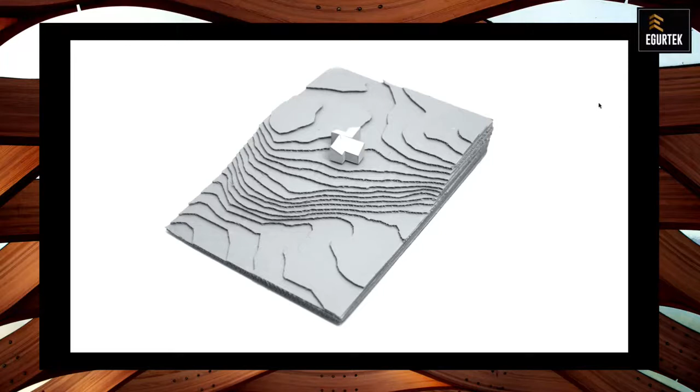As a site strategy, we needed to consider the views from the site as well as the program, but we also wanted to address the climatic setting. While it's in central Norway, the summer and winter climate is very contrasting and relatively rough, as you might imagine in the northern hemisphere.

So the orientation of the building on site creates two outdoor sheltered spaces: one in the lower left of your screen, the morning gathering area, and the other on the right, the outdoor gathering area for the afternoons and evening sun—making use of the limited solar exposure in this type of climate.

As you might know, we have very little sun for 6 months of the year, and then lots of sunshine in the summer. So we try to make the most of the sunlight that we have.

Additionally, the site has views in 4 directions: towards the lake, towards the forest, towards the hillside, and up to the sky. So as a site strategy, we designed with the views in mind, pointing the wings in the direction of the views.

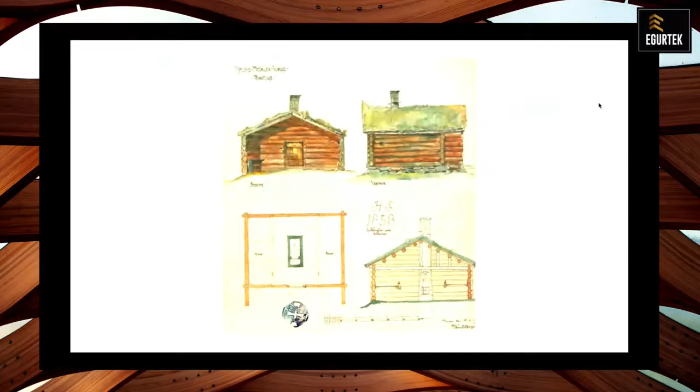This drawing is of a traditional Norwegian cabin from the mid-1800s, and if you look at the plan on the bottom left, you see there's a central fireplace that really forms the heart of the building, and it creates 2 different spatial zones within the cabin, one for living and one for sleeping.

Similarly, the plan for this project is organized around these functional cores that are placed in the center of the wings, allowing the functions to be compactly concentrated into zones, which subsequently allow the space to flow freely around and above them. So they really become spatial organizers and organize the experience of being in the cabin itself.

And this configuration also really helps with the economy of the space. At 85 square meters, here shown, it can sleep 12 people.

The spatial arrangement of these cores has the ability to allow an expansive openness, even on a relatively small floor plan. The cabin feels quite large, also with the high ceilings and the way in which we have manipulated the light and the openings to the exterior, allowing the wings and the zones to flow freely around the cabin and really connect to the exterior as well.

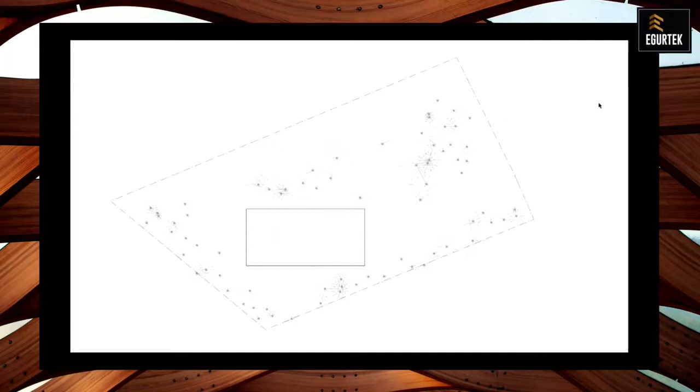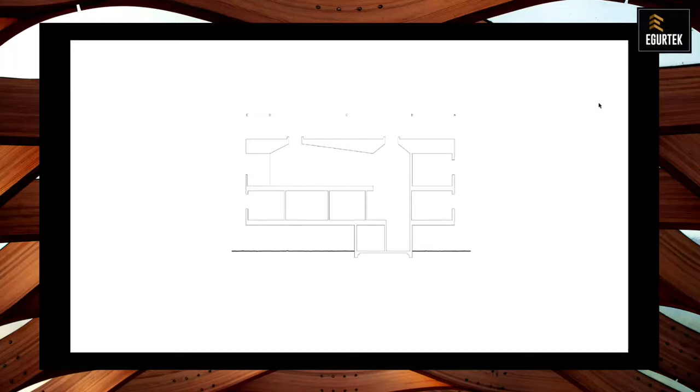Based on the alpine chalet type, the house is lifted on concrete legs to protect it from the large amount of snow that comes in the wintertime. The program is stacked on 3 levels. The entry level is where the skis are kept and where you enter. The bedroom level is the second level, and the top level is the public zone with living areas where the family gathers.

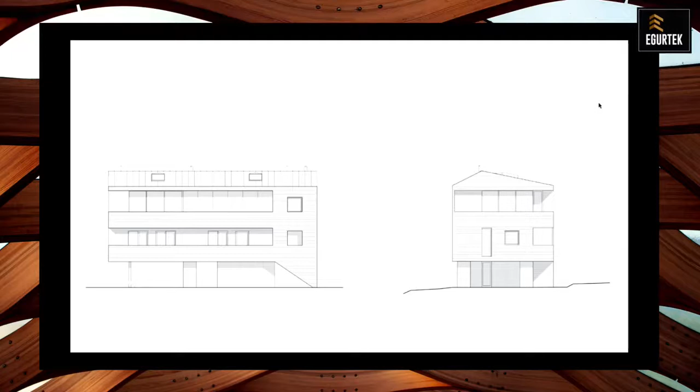Here you get a reading of the concrete plinth, how it functions, and how it's built so that it can be robust and sit exposed to the snow for an extended period of time. On the west and south facades, we have large, deep overhangs to protect the window openings from the summer sun, which is very strong in California, and also to protect the balconies from the snow in wintertime.

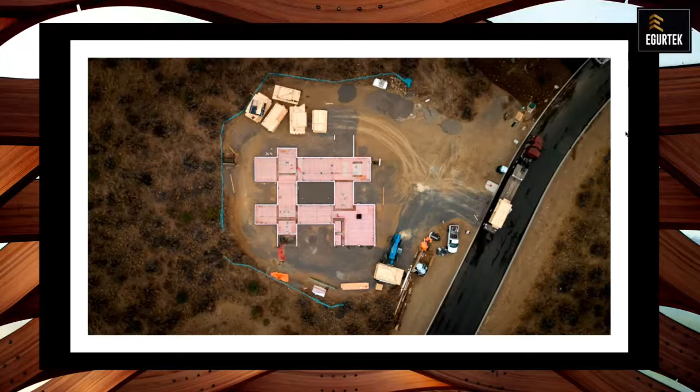In the floor plan, you see there are some formal similarities to the first project, both in plan and in the roof form. And we see this project as a progression from a single pinwheel or cruciform plan to more of a woven courtyard typology.

It also has greater indoor-outdoor connection with larger windows because of the climate, being in Oregon, and also being able to have more direct physical access to the open and the closed courtyards, as well as the landscape beyond.

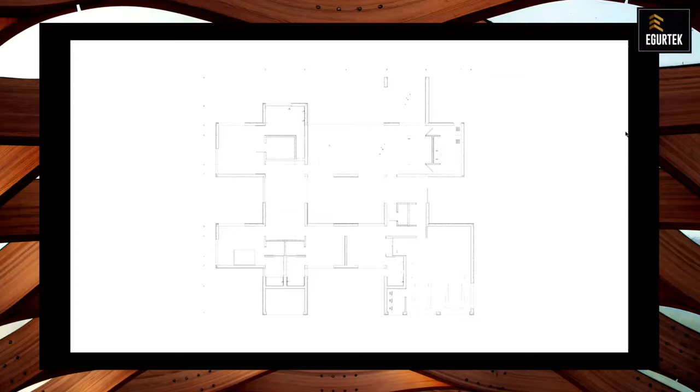But the plan is really designed to be able to flow around the different zones of the house, a house almost without corridors like the first project I showed.

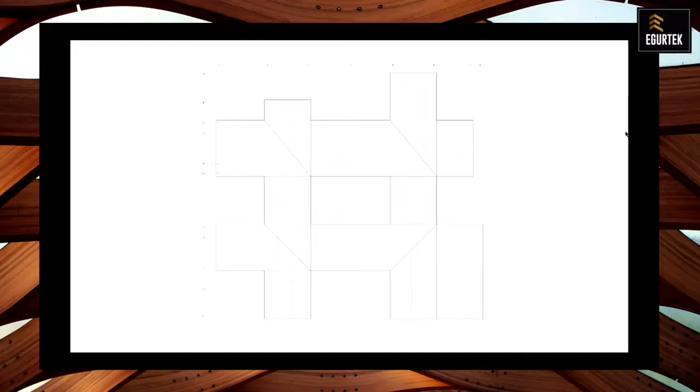The courtyards are used as a way to organize the spaces and shield from hot summer sun and the winter winds. Here again, the different wings are reaching out into the landscape, creating a wider range of spatial types and program functions. The courtyard is really the hub of the house, creating more private spaces around it.

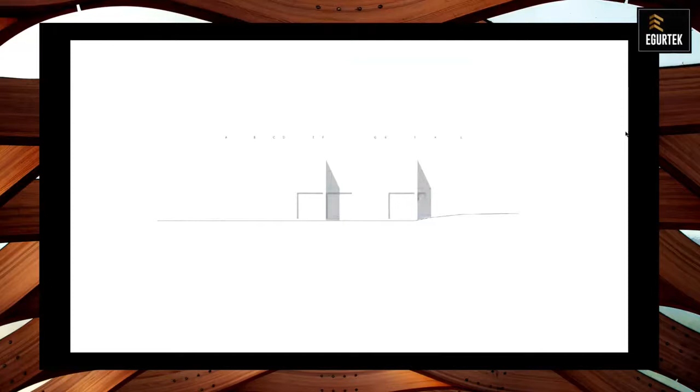And here's an early rendering showing the shosugiban siding. Again, the roof form has some similarities with the first project, but multiplied over a woven plan rather than a pinwheel or a cruciform plan.

And this results in something that's morphologically unique and creates varied spatial experiences in each one of the various wings. Although it's a strong form, it also has...

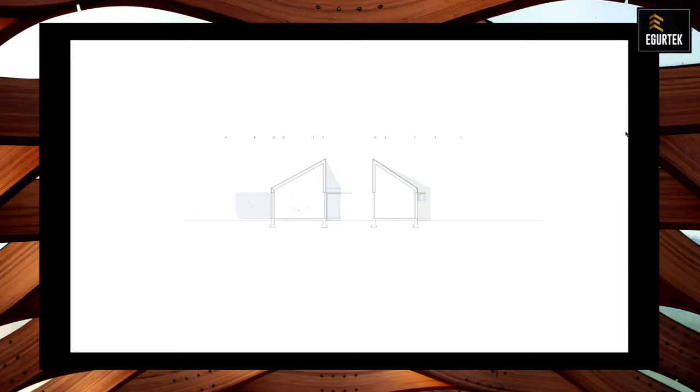...transparency with clear views through the buildings, through the volumes itself, and also through the courtyards running north-south and east-west. So you can see through the buildings from several vantage points. And the building also has a very different presence on all sides, pursuing a sort of interplay with perception.

And the house again evades a singular reading. You can't really understand the whole house, all of its parts and how they weave together, without moving around the house and inside the house.

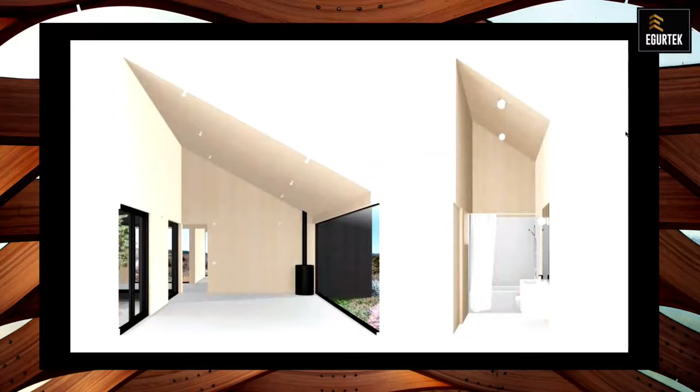And the dramatic slope of the roof is functional for shedding the snow, but it also has the benefit of introducing generous ceiling heights in all the different rooms and wings.

And since each room is the same height, but the footprint is different, you get a range of spatial qualities as well, just by tweaking one of the variables.

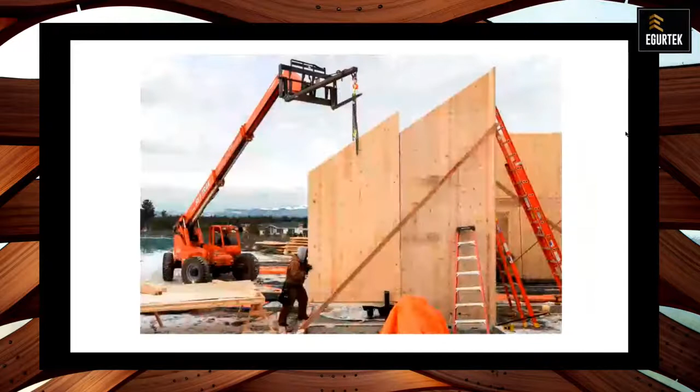Here are the cross-laminated timber panels being installed. They were produced by what I believe is one of the first factories in the United States to produce cross-laminated timber. It's in the neighboring state of Montana, by a company called SmartLam.

And the cross-laminated timber on the interior will be left raw due to the clients being open to a more elemental aesthetic.

However, much attention was also paid to detailing and hiding the plumbing and electrical and so forth, to create an all-CLT or all-wooden interior expression.

And there you see the punched openings, the windows that will connect to the landscape and through to the courtyards, and get a sense of how the light might be and the views out to the landscape, and also from room to room.

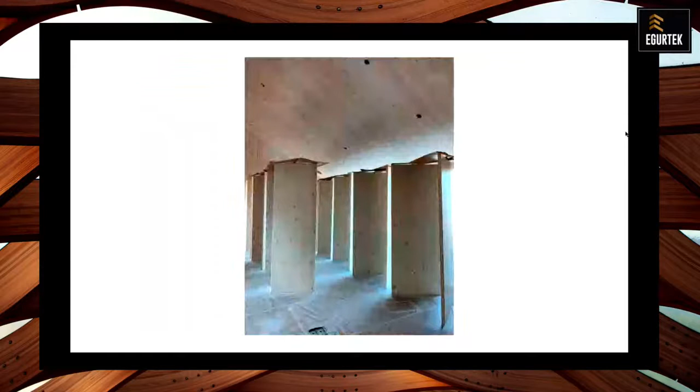And I believe, yeah, these are the laminated timber doors about to be installed.

You might be familiar with the Japanese heat treatment of wood called shosugiban, but again, this material was chosen by the owners as a reference to the fire.

Lastly, we have a project that we call the Skigard cabin. This is in Norway, located on a mountaintop at about 1,000 meters above sea level, overlooking a cultural landscape of farms dotted in the valley below. It's actually in the Alpine ski resort that hosted the 1994 Olympics in Lillehammer, where they had the downhill skiing events, so it's a relatively new resort.

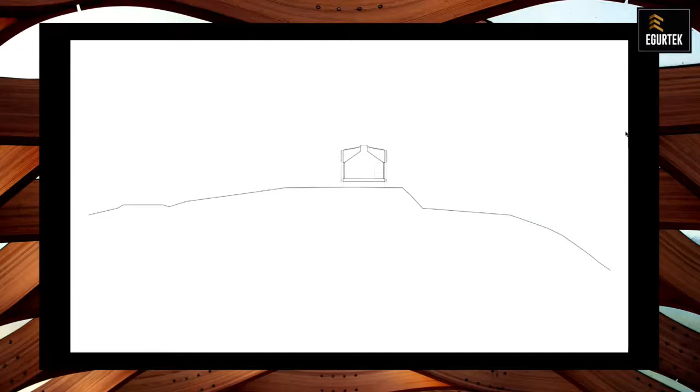It was very important for us in this project to save the existing topography, and there were also some old animal paths that we wanted to maintain. So our first move was the thought of lifting the building above the terrain to try to maintain the terrain as existing.

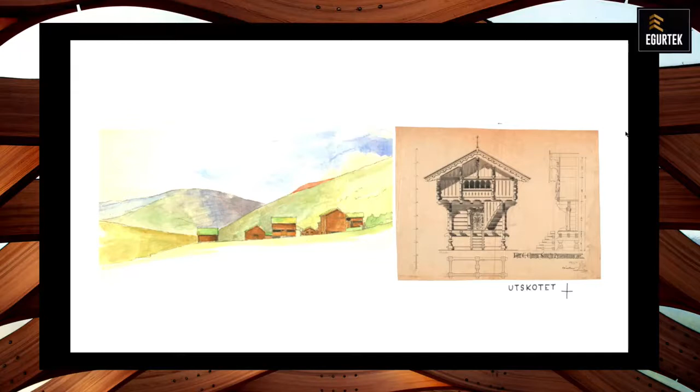In the section on the right, you see the stairway removed from the main volume, as a floating separate staircase element.

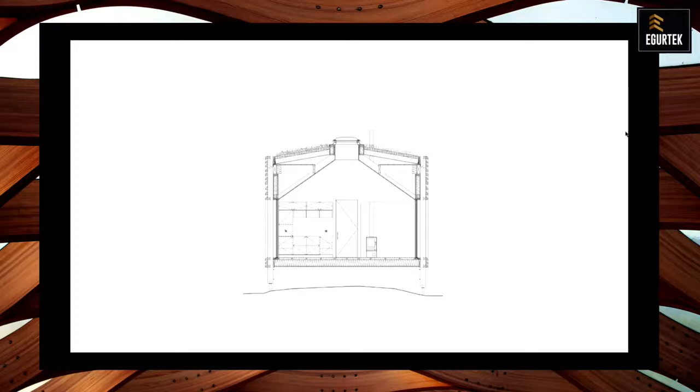There are 4 frustum ceilings with roof windows that punctuate and divide the cabin into 4 separate spaces, with the intention of making it feel like 4 small cabins in a row instead of one larger space. There are always opposing windows as you're walking up and down the building, so you have a view on either side as you're moving through. So every room really has a view.

The 45 cross-laminated timber columns were all pre-cut by CNC, and they sit on the outside of the building to support the volume, which is actually sleeved onto the inside of the columns. Finally, there's the wood log skin that sleeves over the columns themselves.

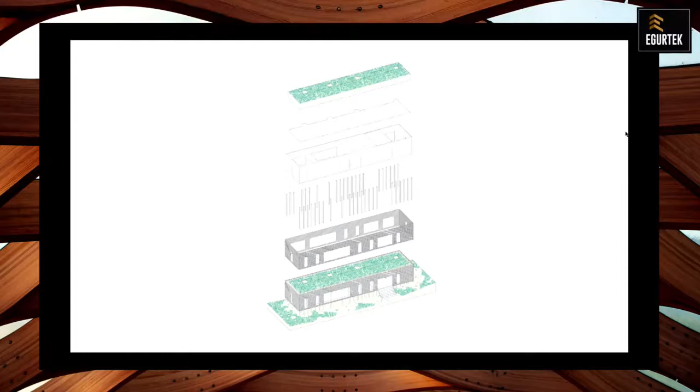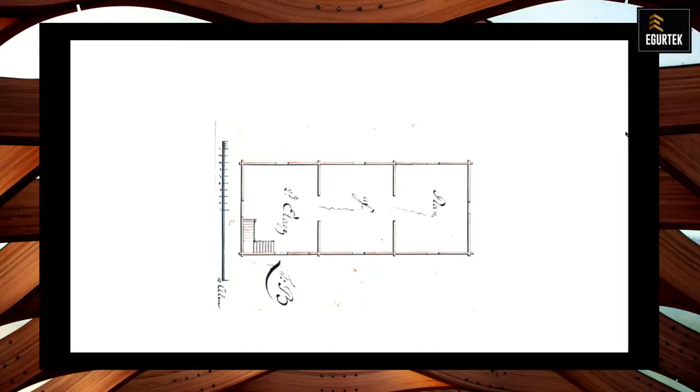The plan in some ways follows a typical local historical precedent known as a Trønderlån, a specific regional typology. It's a very simple plan typology, becoming a long, narrow house with a central circulation path, with openings always opposing each other as you walk through and on your left and right. These buildings were typically built over many centuries—you'd build one house first, then add the next room, and the next, through generations as the family grew and as there was the economic means to do it. So it usually evolved one volume at a time.

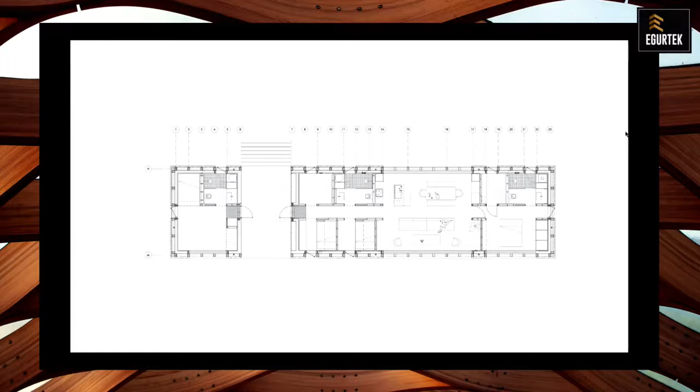Here you can see the rooms are flanked on either side of the elongated house. The intention is that you can see through the house at all times, connecting to the surrounding nature from every room as you're walking up and down the building. This was the main purpose, so you can always experience the site from each individual space.

The circulation path opens up onto this very open, lofty feeling space, yet it's quite intimate because it's relatively modest in size and plan. The arrangement of the plan gives every space a private panorama to the exterior and a view in the opposite direction down to the bedrooms, always giving you a view out to the landscape as you move through the separate cabin volumes tied together on this central axial pathway. You get a sense of the sectional quality of the building too, of the ceiling, which is punctuated with a roof window.